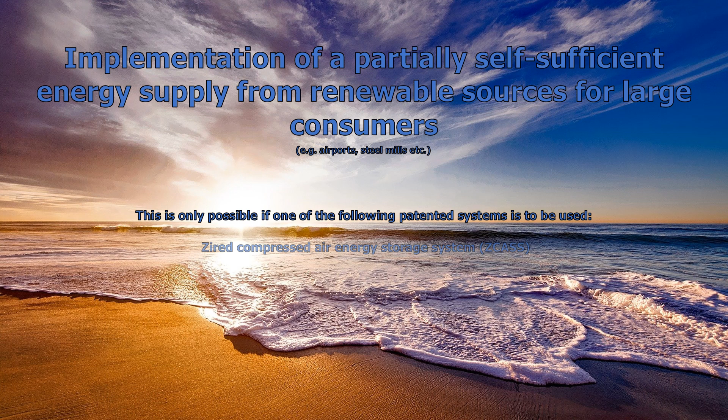Implementation of a partially self-sufficient energy supply from renewable sources for large consumers, e.g. airports, steel mills, etc. This is only possible if one of the following patented systems is used: the Zired Compressed Air Storage System (ZCASS), the Gravity Storage System (ZGASS), or the Hydroelectric Storage System (ZHASS).

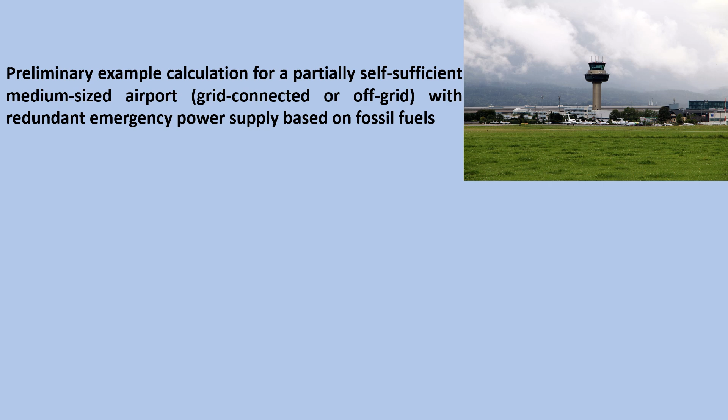Preliminary example calculation for a partially self-sufficient medium-sized airport, grid-connected or off-grid, with redundant emergency power supply based on fossil fuels. Facts: the electricity consumption of a medium-sized airport depends on many factors, such as the size of the airport, the number of passengers, the number of aircraft movements, technical equipment, and the efficiency of the energy supply. However, a medium-sized airport typically consumes between 50 and 150 gigawatt-hours of electricity per year.

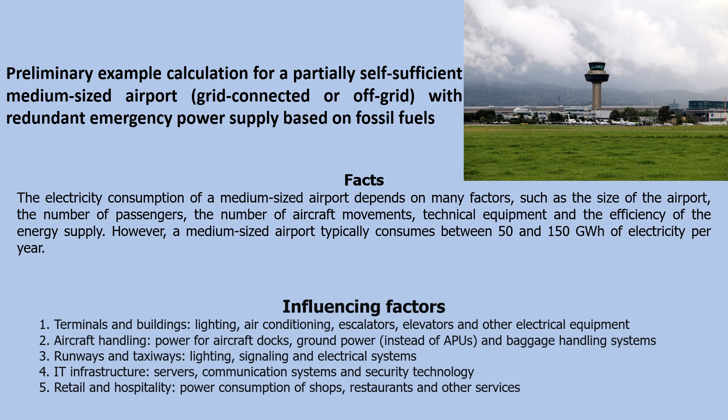Influencing factors: 1. Terminals and buildings - lighting, air conditioning, escalators, elevators, and other electrical equipment. 2. Aircraft handling - power for aircraft docks, ground power instead of APUs, and baggage handling systems. 3. Runways and taxiways - lighting, signaling and electrical systems. 4. IT infrastructure - servers, communication systems, and security technology. 5. Retail and hospitality - power consumption of shops, restaurants, and other services.

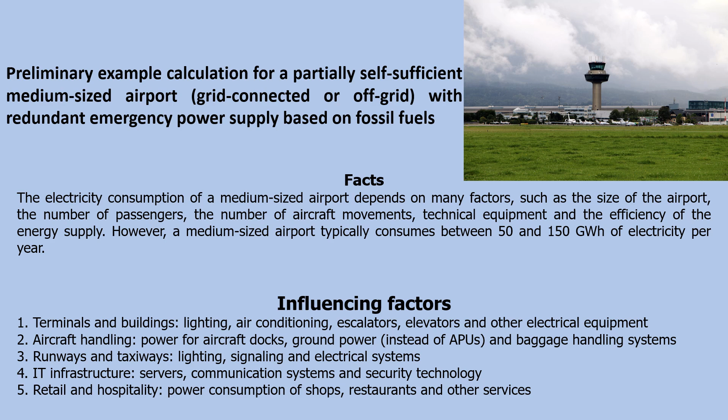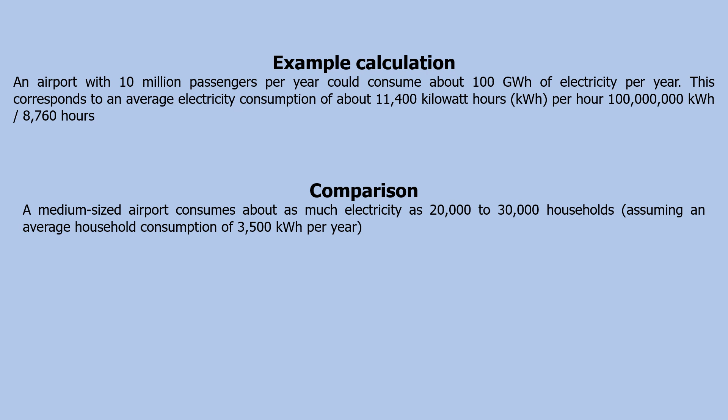An airport with 10 million passengers per year could consume approximately 100 gigawatt-hours of electricity per year. This corresponds to an average electricity consumption of approximately 11,400 kilowatt-hours per hour (100 million kilowatt-hours / 8,760 hours). A medium-sized airport consumes approximately the same amount of electricity as 20,000 to 30,000 households, assuming an average household consumption of 3,500 kilowatt-hours per year.

To achieve an annual production of 100 gigawatt-hours, we need to calculate a mix of solar panels, wind turbines, and Zired solar thermal power plants based on their average output and local conditions. Here is a simplified approach.

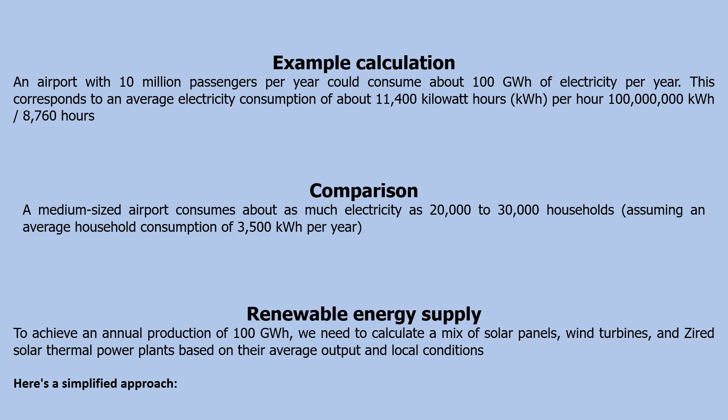1. Solar panels. Average power of a solar panel: a typical solar panel has a power of about 300 watts (0.3 kilowatts). Full load hours: the number of full load hours depends on the amount of sunlight. In Asia, for example, about 1,200 to 1,800 full load hours per year is realistic.

Calculation: annual production 40 million kilowatt-hours, power per solar panel 0.3 kW, full load hours 1,600 hours. Number of solar panels = 40 million kilowatt-hours / (0.3 x 1,600) = 83,334. Result: to produce 40 gigawatt-hours per year, you need about 83,334 solar panels.

2. Wind turbines. Average power of a wind turbine: a modern onshore wind turbine has a power of about 3 MW (3,000 kilowatts). Full load hours: onshore wind turbines in Asia have about 1,800 to 2,000 full load hours per year.

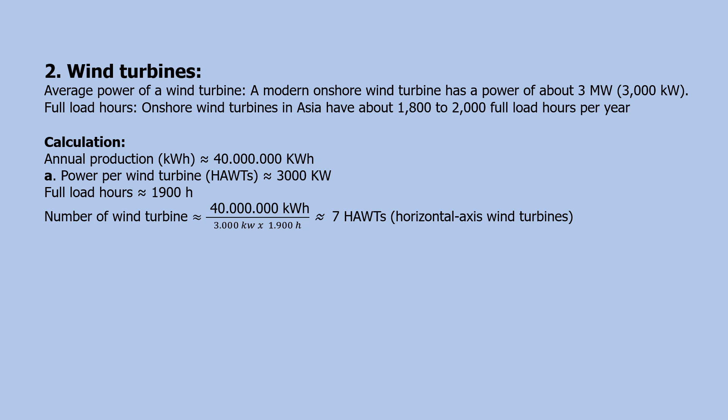Calculation: annual production 40 million kilowatt-hours, power per wind turbine (HAWTs) 3,000 kilowatts, full load hours 1,900 hours. Number of wind turbines = 40 million kilowatt-hours / (3,000 x 1,900) = 7 HAWTs, horizontal axis wind turbines.

Power per wind turbine (VAWTs) 100 kilowatts, full load hours 1,900 hours. Number of wind turbines = 40 million kilowatt-hours / 190,000 = 200 VAWTs, vertical axis wind turbines.

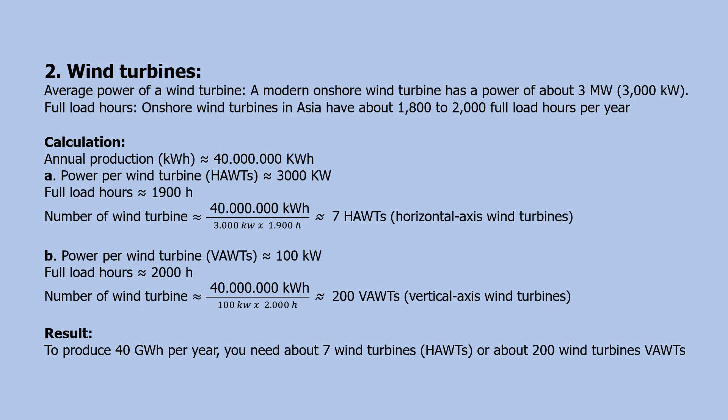Result: to produce 40 gigawatt-hours per year, you need about 7 wind turbines (HAWTs), or about 200 wind turbines (VAWTs).

3. Zired solar thermal power plant. Average power of a Zired solar thermal power plant is about 3 MW. Full load hours depend on the amount of sunlight. In Asia, for example, about 1,500 to 1,800 full load hours per year is realistic.

Calculation: annual production 40 million kilowatt-hours, power per Zired solar thermal power plant 2,000 kilowatts, full load hours 1,800 hours. Number of Zired solar thermal power plants = 40 million kilowatt-hours / 2,000 = 12. Result: to produce 40 gigawatt-hours per year, you need about 12 Zired solar thermal power plants.

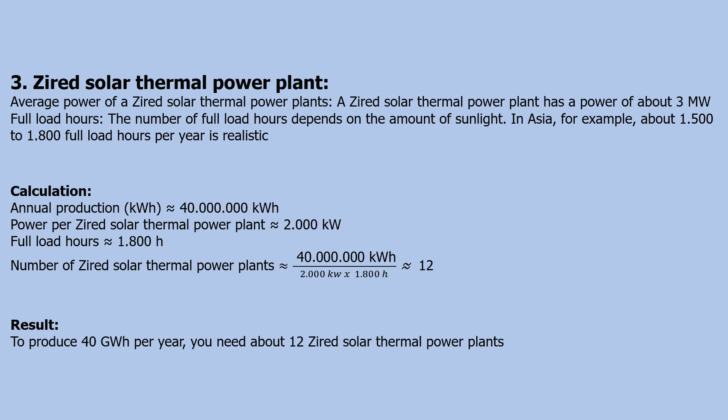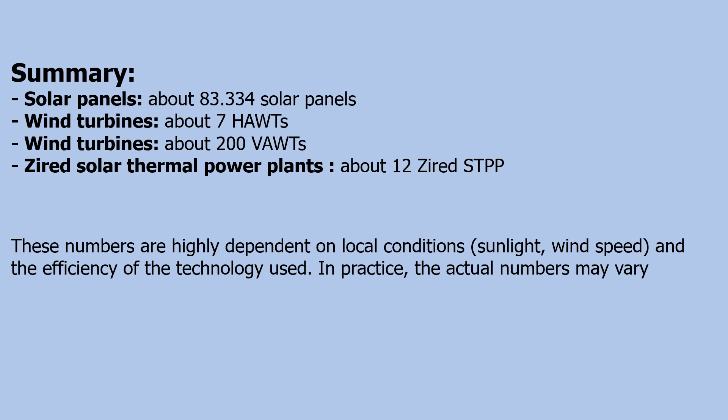Summary: solar panels, about 83,334 solar panels; wind turbines, about 7 HAWTs; wind turbines, about 200 VAWTs; Zired solar thermal power plants, about 12 Zired STPP. These numbers are highly dependent on local conditions - sunlight, wind speed, and the efficiency of the technology used. In practice, the actual numbers may vary. Our recommendation is the use of HAWTs, VAWTs, and Zired STPP.

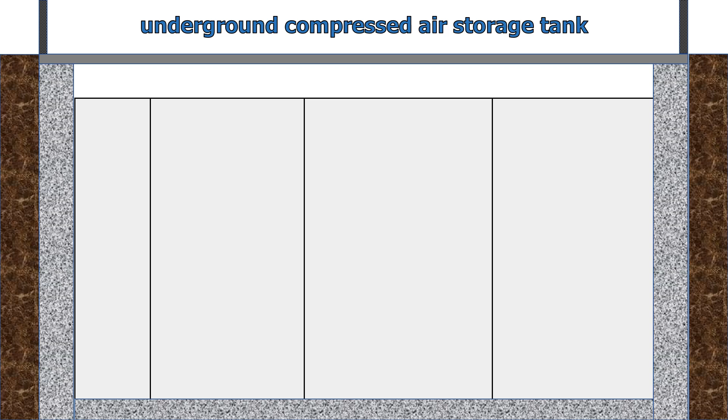Zired Compressed Air Storage System, ZCASS. Example design capable of having a storage capacity of 200 MWh up to 2 or more GWh. Underground compressed air storage tank - example of an underground compressed air storage system.

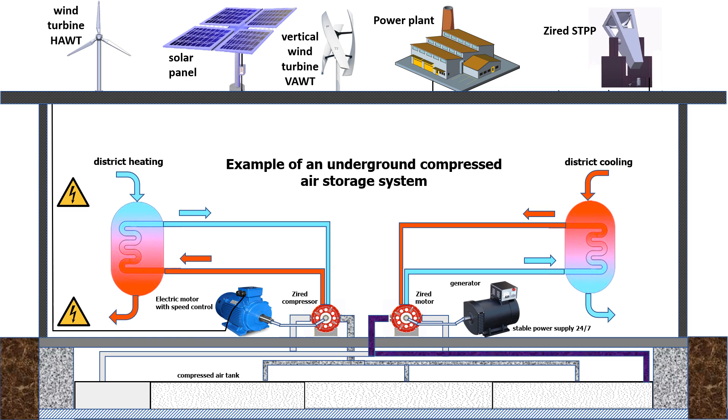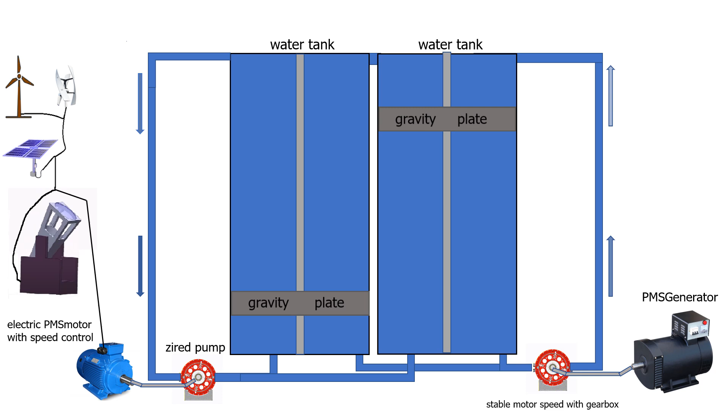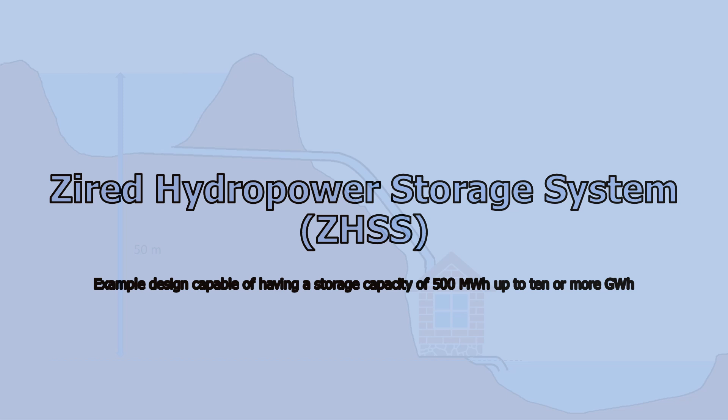Zired Hydropower Storage System, ZHSS. Example design capable of having a storage capacity of 500 MWh up to 10 or more GWh, using 2 natural or artificially created basins of water with a water level difference of at least 50 meters.

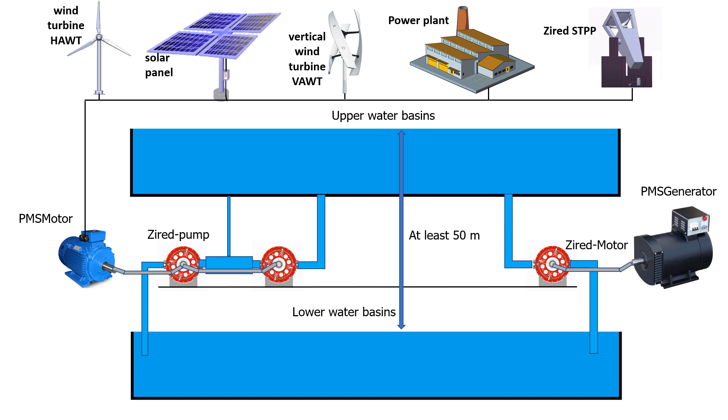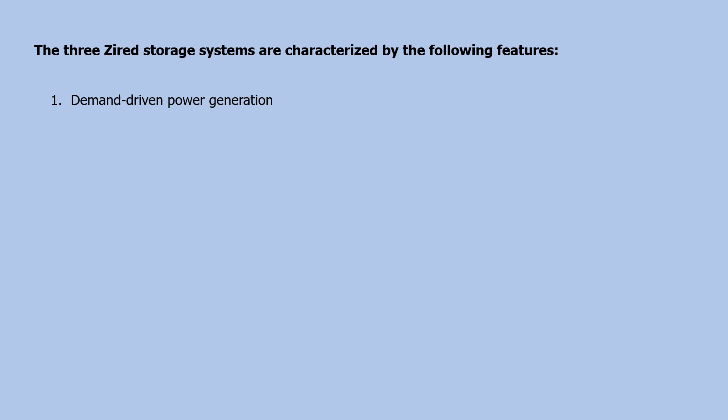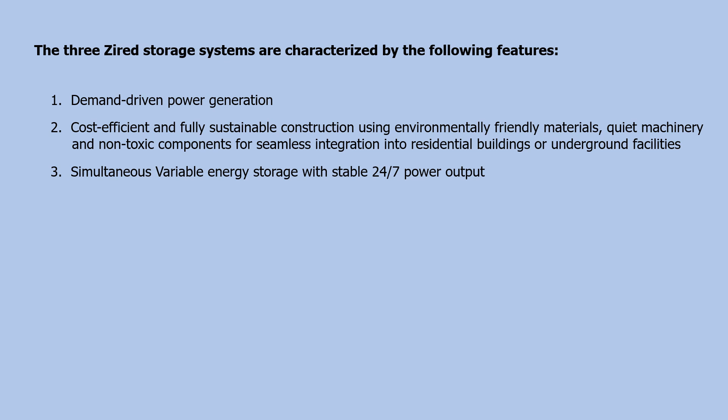The three Zired storage systems are characterized by the following features: demand-driven power generation; cost-efficient and fully sustainable construction using environmentally friendly materials, quiet machinery, and non-toxic components for seamless integration into residential buildings or underground facilities; simultaneous variable energy storage with stable 24/7 power output; extended emergency power supply to maintain electricity production for days to weeks during temporary unavailability of renewable energy sources.

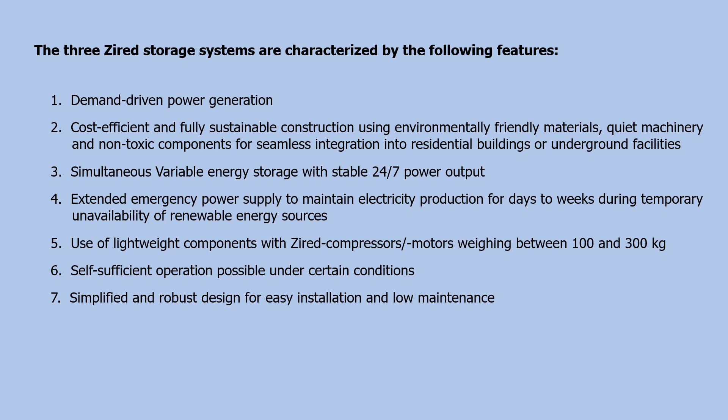Use of lightweight components, with Zired compressors/motors weighing between 100 and 300 kilograms. Self-sufficient operation is possible under certain conditions. Simplified and robust design for easy installation and low maintenance. Ensuring district heating and cooling supply for communities via the compressed air system. Applying the principle of fluctuation compensation to stabilize energy production - this means that renewable energy is first stored and then used to produce stable electricity, providing outstanding cost efficiency in terms of price-performance ratio.